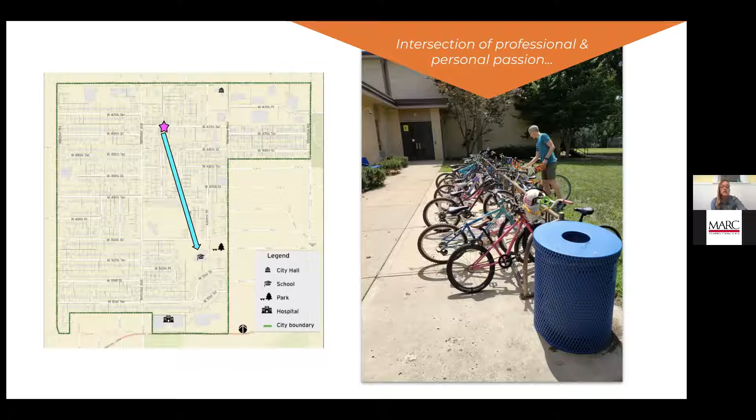It's a great way for us to see our neighbors, say hi to passing dog walkers, keep an eye on changing holiday decorations, and add some movement to our day. Rarely do we ever walk in silence, as there's always something to see or someone to talk to that generates discussion. Based on the sheer number of neighbors and friends we see walking daily, as well as the number of bicycles crowding the bike rack, having the school within a manageable walking, riding distance is also a positive factor for other families in the neighborhood. Making sure that these streets stay safe, not only for my family, but for the entire community, has caused my personal and professional worlds to collide.

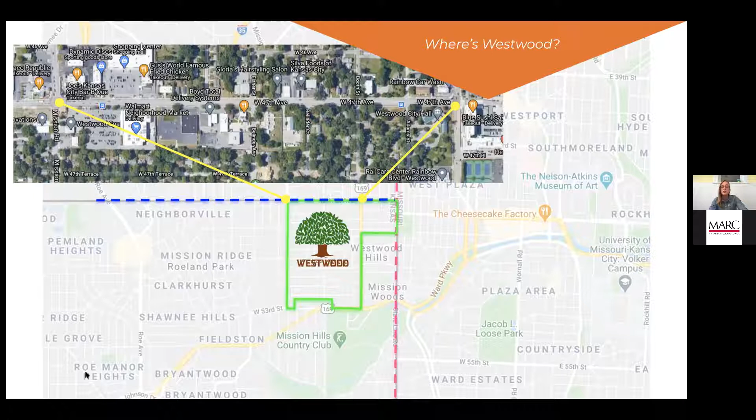This opportunity allows me to present to colleagues across the region. I wanted to just briefly localize Westwood and our project within the metro. Westwood is located at the very northeastern tip of Johnson County. Neighbors to the north are Wyandotte County and the Rosedale community. Neighbors to the east are Jackson County in Kansas City, Missouri. Our major delineating streets are 47th Avenue to the north, State Line to the east, Shawnee Mission Parkway to the south, and Mission Road to the west. Our 47th Street Complete Streets project area is noted in the inset at the top. This location within the metro serves us well on many different levels. We are able to lead, learn, and innovate from our county and municipal neighbors and partnerships.

So next is a brief overview of some milestones that the 47th Street Complete Street project has passed. This process obviously started before I was a Westwood resident, and I'm only going to cover about a 20-year time span. In 1997, Westwood adopts a comprehensive plan update that incorporates pedestrian improvement considerations specifically along 47th Street. Joe's Kansas City, also called Oklahoma Joe's Barbecue, also opens this year. In 2000, the 47th and Mission Road Corridor Concept Plan is created. One of the identified goals that the plan outlines is improved pedestrian linkages and safety throughout the corridor.

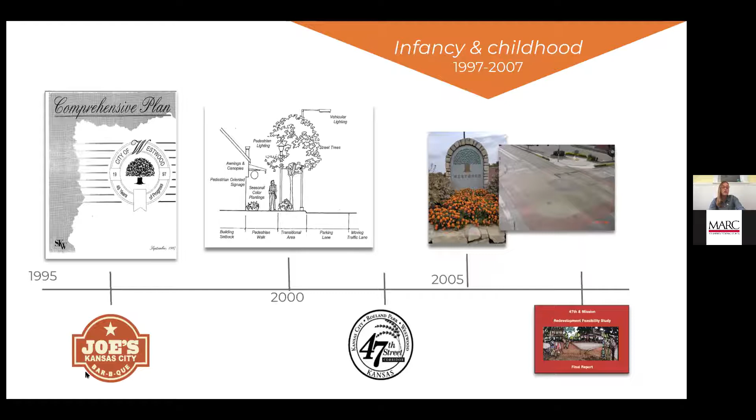In 2002, Westwood, Roeland Park, and Unified Government of Wyandotte County adopted an interlocal agreement, and the 47th Street Committee is formed. Placemaking efforts progressed in 2005, with 47th Street undergoing some rehab work and decorative intersections were installed. In 2007, the 47th redevelopment study was completed. The purpose of this study was to develop a feasible market-oriented plan for the 47th Street and Mission Road intersection area. In 2013, Walmart Neighborhood Market opens, as well as the Taco Republic restaurant. 2015, the Northwood Shopping Center is renovated.

In 2016, Woodside Village opened. This is a housing and retail mixed-use development located at the intersection of 47th Street and Rainbow Boulevard. So that's the east end of this corridor. It attracts a lot of young professionals and provides extra shopping and service choices to residents in the area. The Rosedale Master Plan and Traffic Study is also completed this year. It is explicitly noted within that improving the roadway design of 47th Street is an important part of continuing the forward momentum of this area.

The design of the roadway has a big effect on the safety, walkability, and overall feel of the 47th Avenue district. 2017 was the adoption of the Westwood Comp Plan update, and in 2 out of 3 plan themes, active living by design is called out, and opportunities supporting resident demand for increased walkability, bikeability, and multimodal transportation choices are highlighted throughout. This same year, Westwood submitted a MARC Planning Sustainable Places application with the 47th Street Complete Street Project application and was selected for funding.

2018, KDOT funding for Complete Streets construction was awarded. 2019, Roeland Park, Westwood, and the Unified Government joined forces with the business community to host the first annual 47 Foodie Fest. This event celebrates area businesses and kicked off the branding for the 47. 2020, Westwood Complete Streets policy was adopted by a unanimous council vote. The preliminary striping project to demonstrate Complete Streets functionality in the corridor was completed. The second MARC PSP application was accepted for community engagement for the 47th Street Complete Street project.

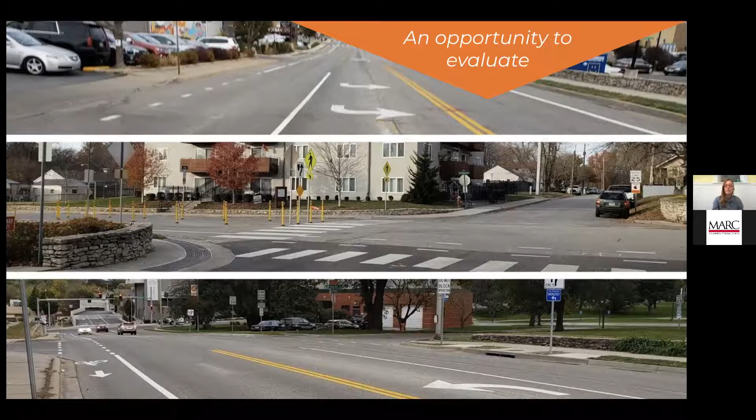These images show the newly completed stripe-only project. You can see the dedicated center turn lane, bike lanes, and one of the 2 improved crosswalks. In October of 2020, the Westwood City Council confirmed a selection committee's choice for a design consultant as we move closer to the actual permanent updates. As of this time, the 47th Street Complete Streets project is in an evaluation stage. Our design consultant will help us understand what is working with the stripe-only project, gather public feedback, and offer design options for the next step of this project.

For this set of lessons learned, I thought it would be best to reach out to John Sullivan, my public works director here in Westwood, Kansas, and get his take on what was striking to him about this project. He gave me a ton of thoughts, and I've narrowed them down to 4. So top of his list was learning the definition of a complete street and expanding on the understanding of what a street has been and what it can be.

Next, this is a very big project for the city of Westwood. Our Unified Government neighbors have multiple projects on this scale and bigger that can very easily distract resources or pull priority from this area. What will maintain the momentum is a persistent partnership with the Rosedale community and the Unified Government, as well as proof that this project will bring social and economic vitality to the neighborhoods on both sides of the county line. The third lesson learned is that human behavior is out of our control, but not the features of the built environment. Redesigning the features of this corridor to encourage and direct safer user behavior will hopefully be a model for the other streets in and around our community.

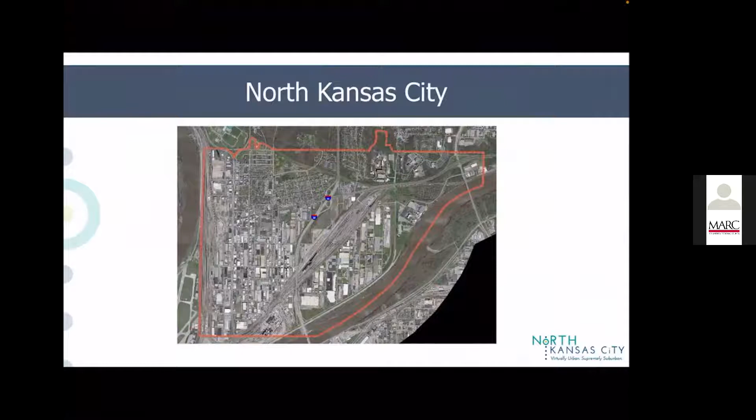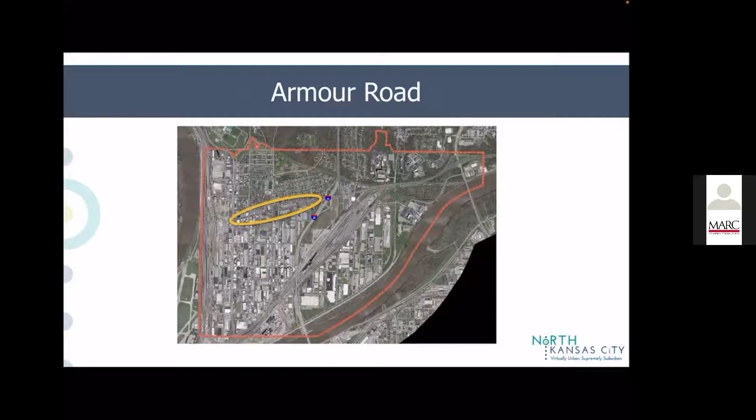So we get a lot of people who drive Armour Road every day, not just to get to destinations in North Kansas City, but also to get from further north, south into downtown Kansas City, Missouri. This is Armour Road in downtown North Kansas City. When people think of North Kansas City, this is often what they think of. It's a 3-lane roadway with on-street parking.

It's very walkable. We have lots of restaurants and some smaller shops and offices, mature trees. People love to walk in this area. And we have a lot of pedestrians in this area, which is great. This is the heart of North Kansas City. But on the east side, this is the same roadway. It's 7 lanes, lots of speeding, fewer pedestrians and bicyclists.

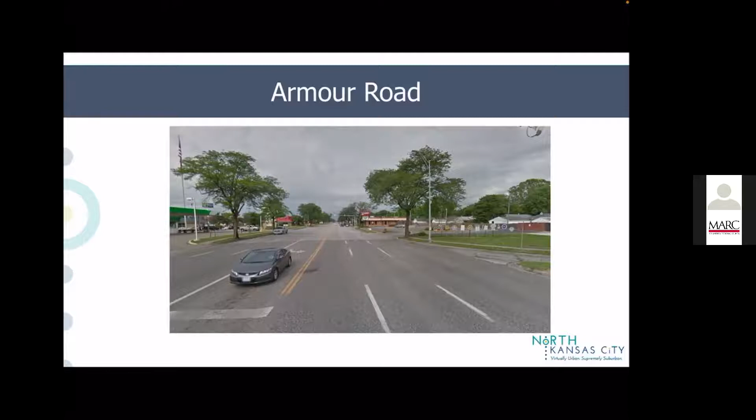So as we looked at this roadway, starting about 5 years ago, one of the main thoughts, at least in my mind, was this is a lot of pavement. And it's a lot of pavement that we don't necessarily need to support vehicle traffic. So as we were updating our master plan, a comprehensive master plan 5 years ago, Armour Road was starting to emerge more and more as a barrier between two halves of North Kansas City.

95% of our residents live north of Armour Road, and most of our commercial and industrial development is south of Armour Road. But as we looked to the future of redevelopment around downtown, we knew more people were going to be living south of Armour Road.

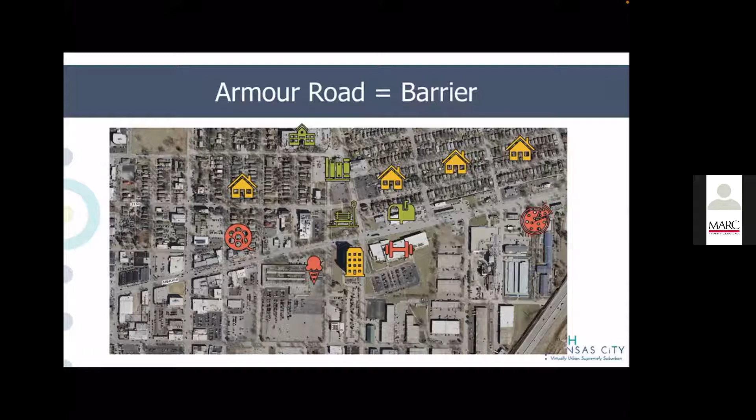And we wanted people to feel like they could walk across that street to get from one destination to another, whether that was getting from their house to Dairy Queen to get an ice cream cone, or getting from new residential development on the south side to Dagg Park and our really popular spray ground or the public library. We wanted more people to feel like that wasn't a barrier, it was a corridor that connected our community.

And this really came out as we were moving through the plan. We asked people, where do you cross the street? And the main places they crossed are Swift and Iron and Howell. Well, what's the same about all of those places? They're all signalized intersections. So there was a place you could go and you knew the traffic was going to stop and give you an opportunity to cross the street.

But we also asked, well, where do you want to cross Armour Road? People wanted to use the unsignalized intersections as well. So we knew that we had some safety concerns to address in looking at our complete street plan. And that was one of the top goals for the community. Safety and economic development was the other one. They wanted this corridor to be a vibrant part of the community.

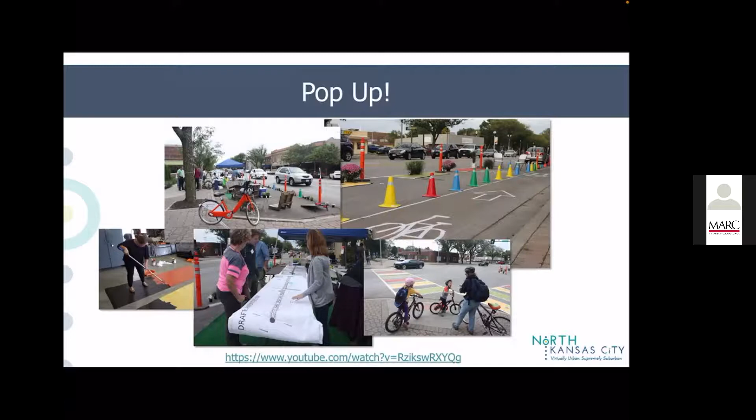So taking all of those directions that we received from community engagement really helped us to define the design for this corridor. And we were able to pilot this in a one-day pop-up demonstration project where we put parking protected bike lanes out. We put in a parklet and we showed people what we were planning. The decorative crosswalk was really fun to construct and install. And it allowed us to show people a vision for that corridor that wasn't just a lot of pavement.

This complete street project is really known for its bike lanes, I think at this point, but it's really not just about the bike lanes. We were also looking at how do we add crosswalk improvements that are beautiful as well as functional. How do we add more community space along this corridor? What are some ways that we can include more wayfinding and also improve transit along the corridor? We do have one main bus route that runs down Armour Road. And so we wanted, long-term, that to be more convenient and useful as well.

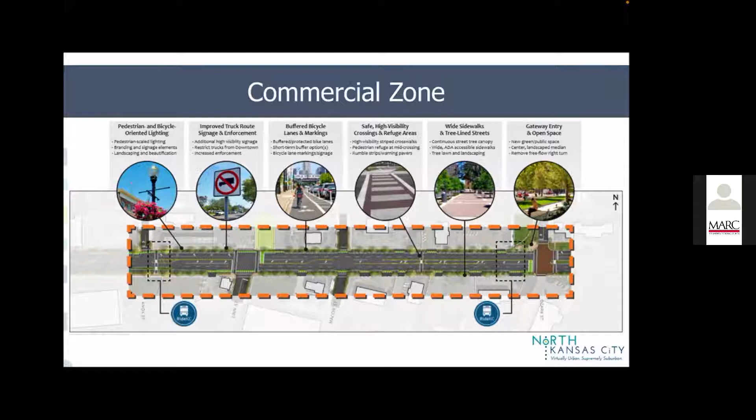So we planned this corridor in 3 zones. The commercial zone is closer to the interstate where we have buffered bike lanes, better signage for our truck routes. Trucks are supposed to turn off Armour Road if they're going westbound when they get to Lynn. Better crossings for people along this section.

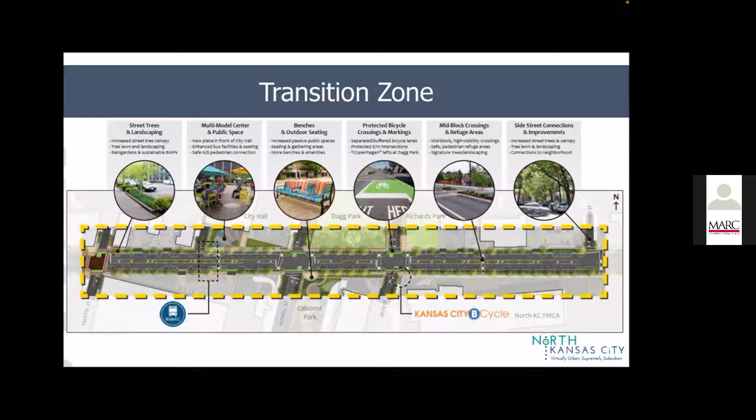The transition zone closer to downtown, we transitioned to a parking protected bike lane, mid-block crossings and refuges for pedestrians, more street trees. We have a floating bus stop that was planned for this area, and then a downtown section that continues some of these improvements into downtown. So that was the plan.

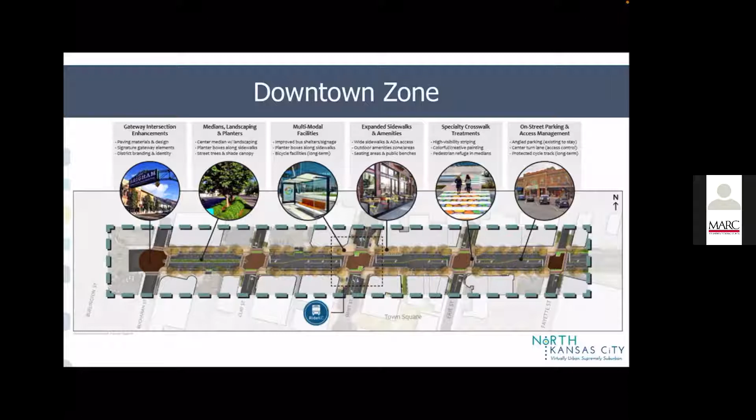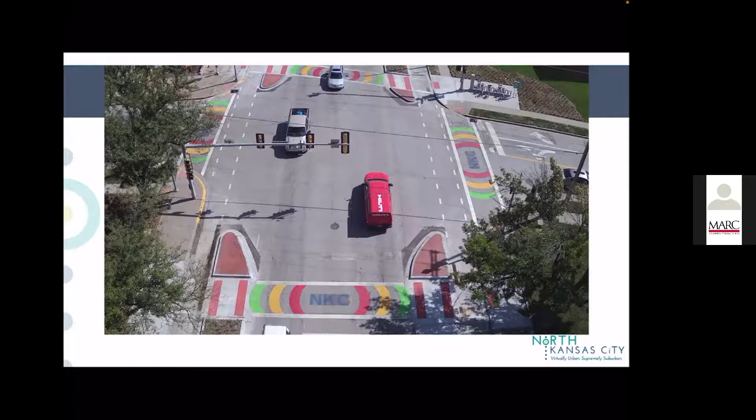This is the intersection of Armour and Iron Street. So because we broke the project up into several phases, we really concentrated in phase 1 on making Iron the showcase intersection, so you could see everything that was going to come further in other parts of the plan here at Iron Street. So the decorative crosswalks, these were so well received when we did our community engagement that we knew we had to include them in this first phase. So we were really pleased with how these came out. And then you can also see the islands there, and the bike lane with the dash lines continuing through the intersection. And here's a street level view of what that looked like.

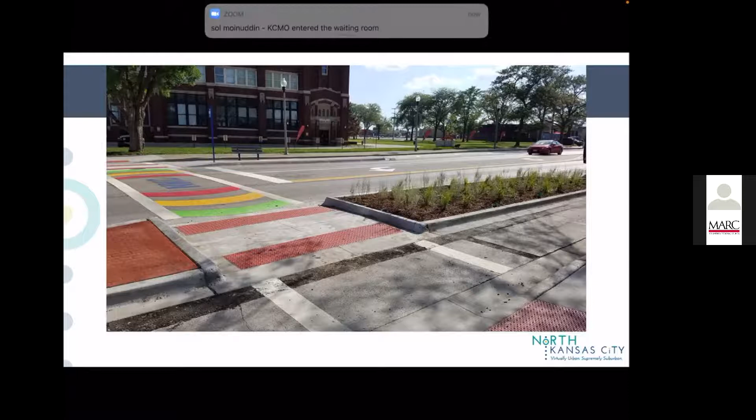Again, we were so happy with how this implementation went. The construction was completed on schedule. The bid was under our budget. Things seemed to be going really well. So what happened next? We started.

Sarah, you've accidentally muted yourself. I don't know how I did that. Yeah, it's a mystery. You're back. We can see there. Yep, we're good. We're good.

Okay. So we started hearing complaints before this project was even finished with construction. And considering that as we moved through the planning process, everything seemed to be very well received, in some ways, the complaints were a real surprise. And we received complaints from residents of North Kansas City, but also a lot from people who were driving through Armour Road to get from one place to another, and so hadn't been a target of our earlier community engagement. But to be honest, it was a really difficult fall of 2019 to deal with all of this.